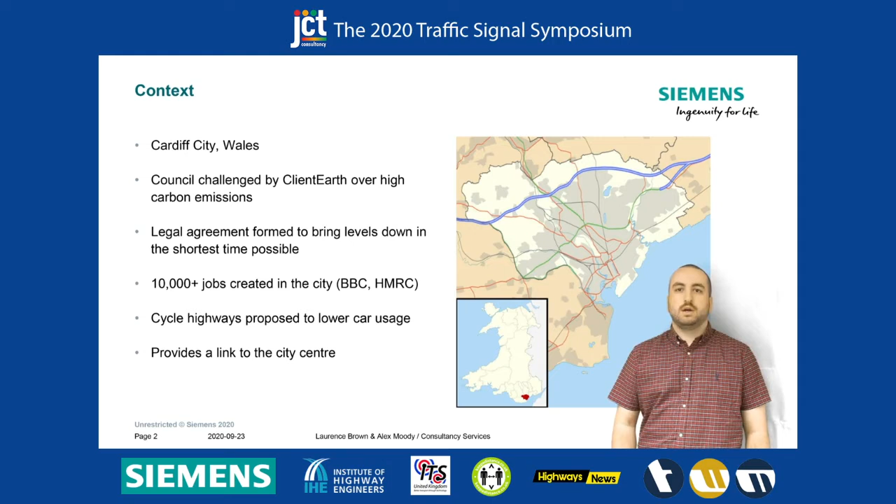This, along with a number of other employers, will bring in an estimated 10,000 jobs to the city centre. To lower the emissions, but to ensure suitable commuting times, a new, state-of-the-art cycle network was proposed. This cycle network will consist of at least 4 major routes linking the suburbs and hospital to the centre of Cardiff. A grant of £21 million was awarded to Cardiff Council to clean up the capital's air pollution. Included in this are the funds to complete the installation of brand new traffic infrastructure across the city, incorporating the new cycle requirements.

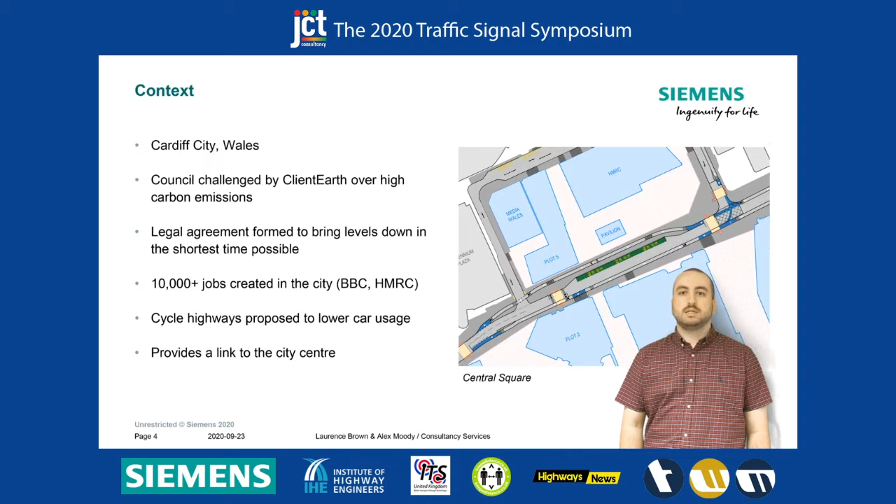One of the cycle highways in Cardiff is named Central Square. This is a loop of segregated cycle lanes linking arterial routes to the newer employer complexes and bus station.

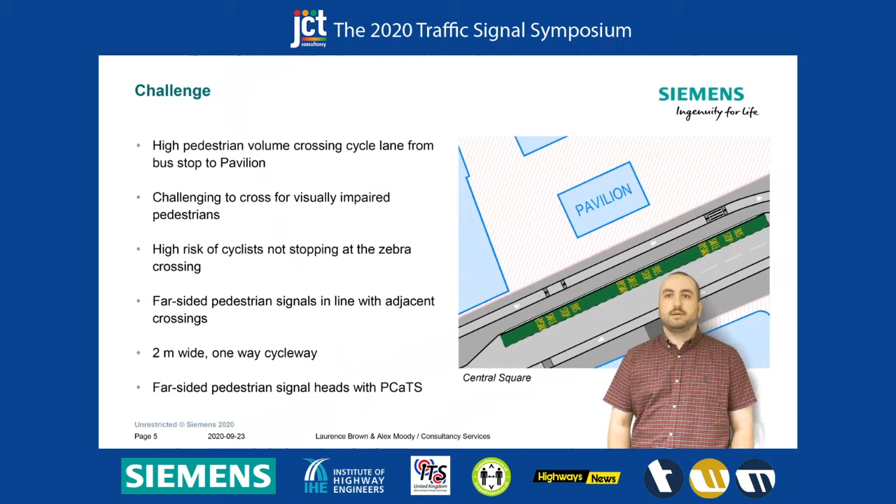So the challenge: Cardiff Council produced models that show up to 10,000 cyclists a day in this area. Being the centre of the capital city and the high number of employers in the area, a high number of pedestrians is also predicted. The 2-metre wide one-way cycle lane runs parallel to the road, but deviates away behind the bus stops, creating a bus stop island.

There is therefore a challenge of pedestrians crossing north from the bus stop island to the pavilion. The client expressed concerns over compliance with the zebra crossings in this location, especially where pedestrians are visually impaired, where there is no tactile feedback to indicate to cross. Therefore, a signalised pedestrian crossing is proposed. This crossing will have to adhere to local and national requirements and indicate to the visually impaired.

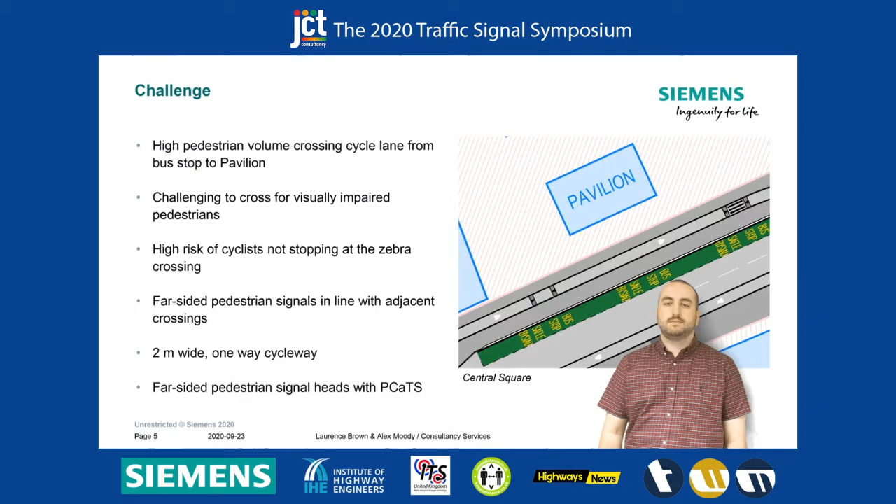Over to Loz to tell you a bit more about the crossing in depth.

We're proposing to use near-sided pedestrian display units as far-sided signal heads. As the crossing length is so short, using near-sided signals on the poles will have similar visual impact as a far-sided pedestrian signal head would have on a traditional crossing.

High and low-level signal heads will be used to control the cyclists. The high-level signal head is considered primary, as it will be most visible on approach to the signals, and the low-level signal assumes the role of secondary, as it's what cyclists look at while waiting at a stop line. We're proposing to use Siemens Heimdall narrow beam cycle detectors in replacement of conventional MVDs.

The reason for this decision is that we require low speed thresholds to ensure slower moving cycles are detected without detecting pedestrians on the footpaths. The narrow beam characteristics of the detector ensure the detection zone will be limited to the cycle lane only.

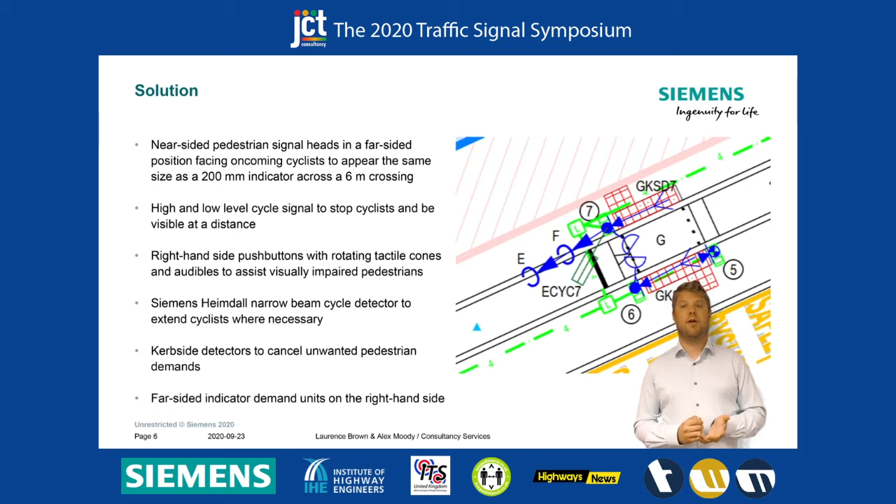All other aspects of the crossing are in line with traditional pedestrian crossings. There will be right-hand push buttons with rotating tactile devices and kerbside detectors to cancel any unwanted demands. Far-sided wait boxes are proposed for placing demands, as this crossing should be considered a far-sided crossing.

Here are some CAD mock-ups we've produced to depict how the crossing would look. As the use of near-side indicators as far-side signals does not conform to regulations, we needed to gain approval from the Welsh Government. These drawings were used as part of our submission to the Welsh Government for trial approval. Please take a few moments to look at these proposals.

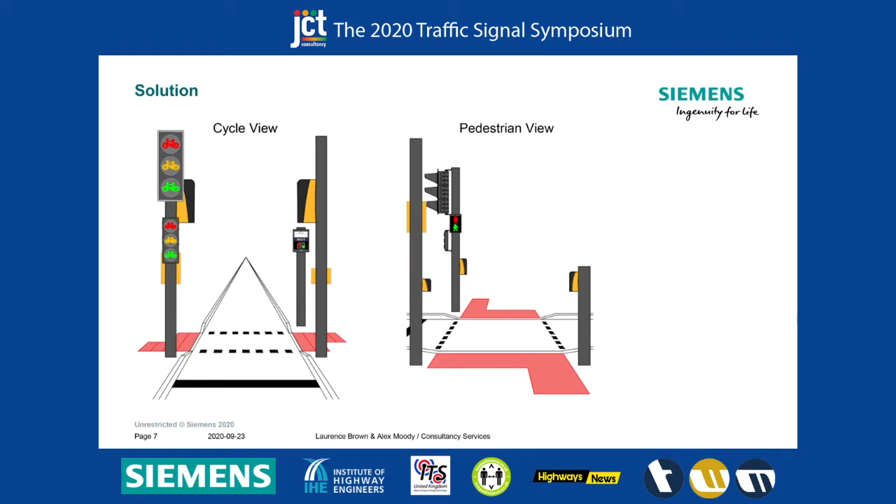In addition to the central square cycle route, there are further routes in Cardiff benefiting from improved cycle infrastructure. These routes include a mix of signalised junctions and pedestrian crossings, all with cycle signal equipment proposed. The current scope of works includes the provision of further cycle routes following the successful implementation of the central square cycle route.

However, the COVID pandemic generated a requirement to provide pop-up cycleways in addition to the originally proposed cycle routes. The pop-up cycleways are to be introduced to discourage the use of public transport, which makes social distancing difficult, and encourage the use of cycles, where social distancing is much easier.

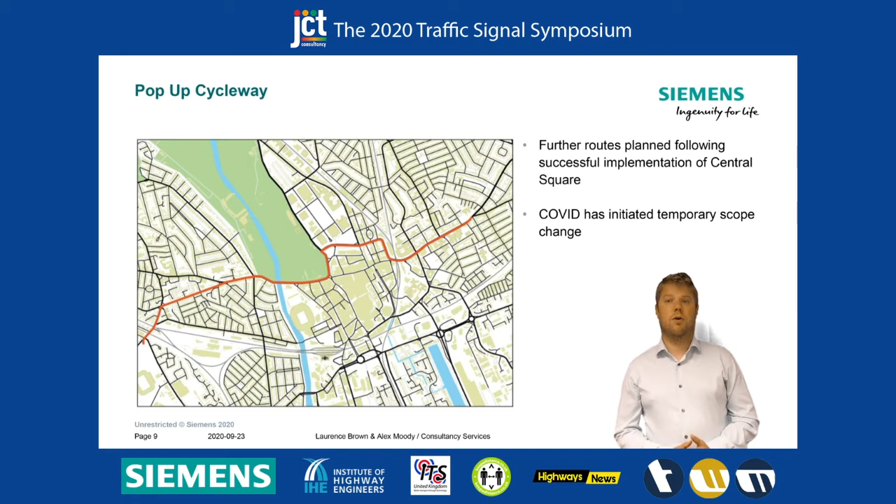The pop-up cycleway equipment is to be added to existing signal intersections by adding cycle signals and detection where necessary, and junction reconfigurations. The introduction of pop-up cycleways does have potential to create further challenges, namely cycle congestion on the network, which would work against the original purpose of the scheme by making social distancing difficult to maintain.

In addition to the new street furniture on site, network operation will be biased towards cycle traffic instead of vehicular traffic. This will be achieved through the use of strategies which could implement a hurry call or dataset triggering, for example.

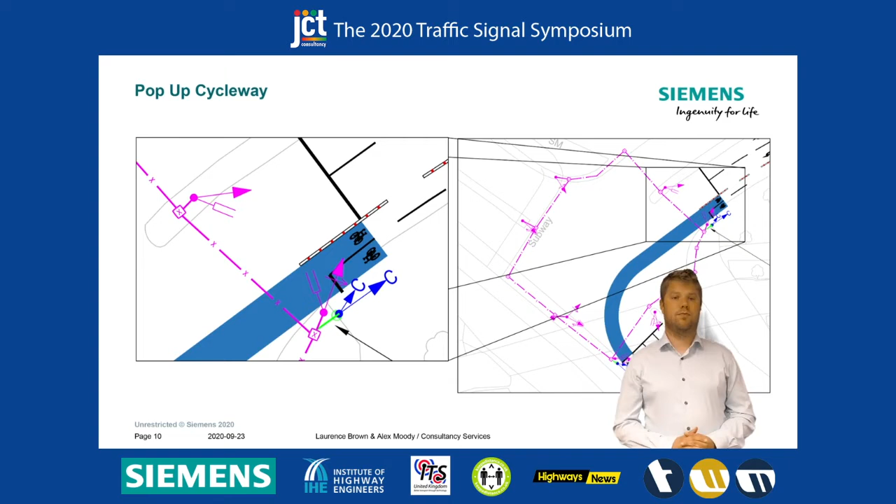Now that we have exhibited a unique proposal of pedestrian signals on a crossing over a cycle lane, we shall move on to looking at innovative design solutions on more traditional cycle infrastructure.

The work we have previously completed in Nottingham used more conventional signal layouts but have more inventive detection methods. At junctions, cycle-specific wireless micro radars were used to ensure bikes of all materials were detected.

The use of micro radars over above-ground detection meant that the detection area was far more precise and forward demands could be placed for the appropriate stage at the junction.

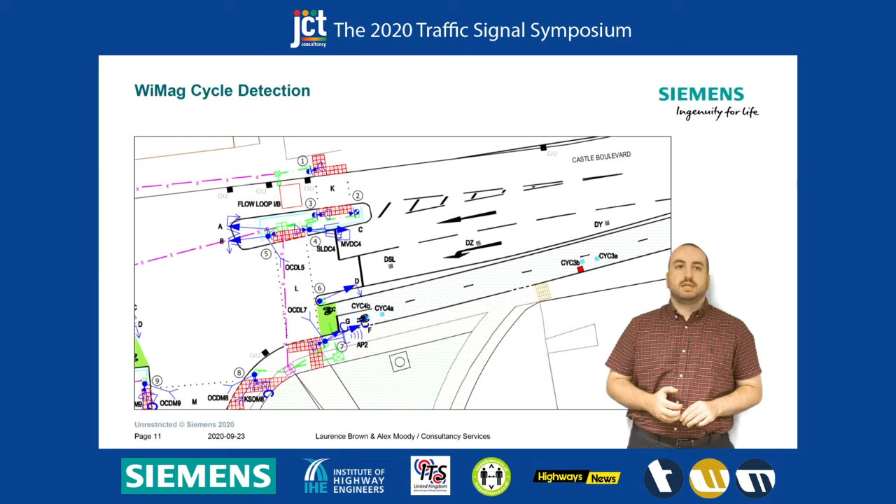The cycle corridor in Nottingham differed from the Cardiff example we have discussed in that it was two-way. To overcome erroneous detections of cycles travelling in the opposite direction, multiple sensors were used and the detection points were configured to be unidirectional.

Following on from Alex's introduction, this is an existing cycle superhighway in Nottingham that Siemens has completed. To give a bit of context to the cycle corridor, the route is approximately 1 mile long, has 5 pedestrian crossings and 1 junction. The junction is installed with WiMag cycle detection.

The reason WiMag cycle detection was the most sensible choice is because it can be quite difficult to cut loops in such small width lanes, and the WiMag cycle detector detects all types of bikes, not just metal ones, as it is radar based.

As the cycle lane is two-way for cycles, it can be quite common for cycles to cross into each other's lanes. For this reason, we installed 2 studs close to each other and configured them as unidirectional.